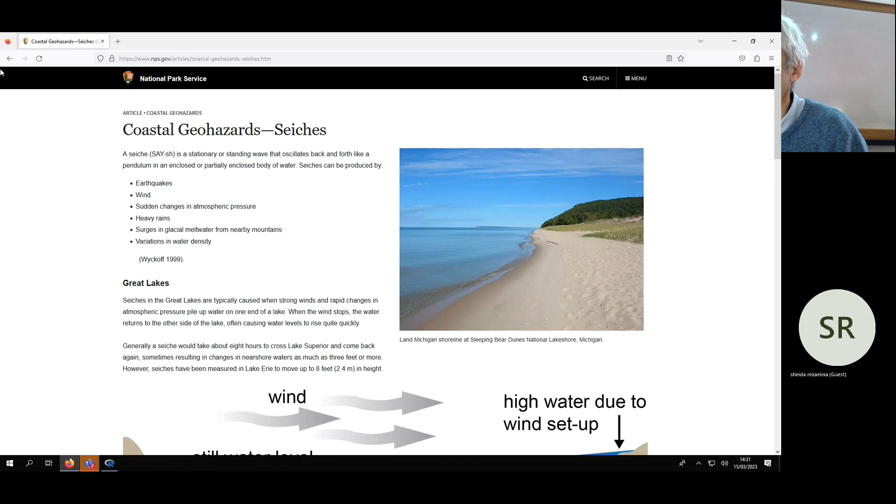Here there is another explanation about the seiches and the Great Lakes, and you can see the same mechanism here.

Keep in mind, let's go back to the previous link to make the correction. Wind usually is not periodic, but imagine a situation where wind is intermittent: when the wind stops, water comes back, and when the wind starts again, the water, after coming back, starts running again in the opposite direction. In such a situation, the displacement of water may be exacerbated, may be increased, because the system has gained additional energy.

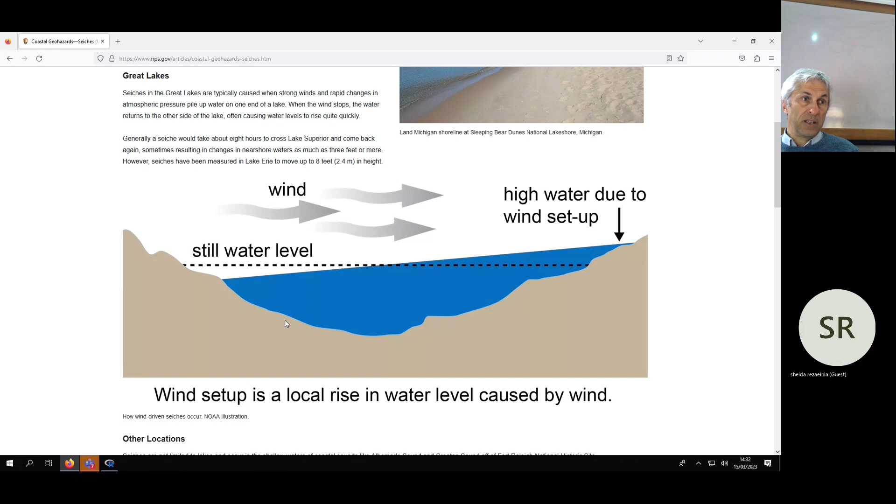Even without any additional forcing, the system will continue to oscillate for some time. When one of these oscillations occurs and wind starts again, the system gains additional energy. Therefore, the combination of the energy from the forcing and the energy accumulated by the system may indeed increase the displacement of water.

On the contrary, if the wind keeps blowing when the water comes back, then the friction of water going against the wind contributes to reducing the oscillation.

So if a forcing is periodical, there is an important feature we need to check: the frequency of the periodicity of the forcing, which we hope doesn't match the frequency of oscillation of the water body.

Usually a water body has an inherent period of oscillation, which is an inherent feature of the water body. So when I said the Great Lakes period is about 7 to 10 hours, that's an implicit admission that this frequency, or period—the same thing—is an inherent feature of the water body.

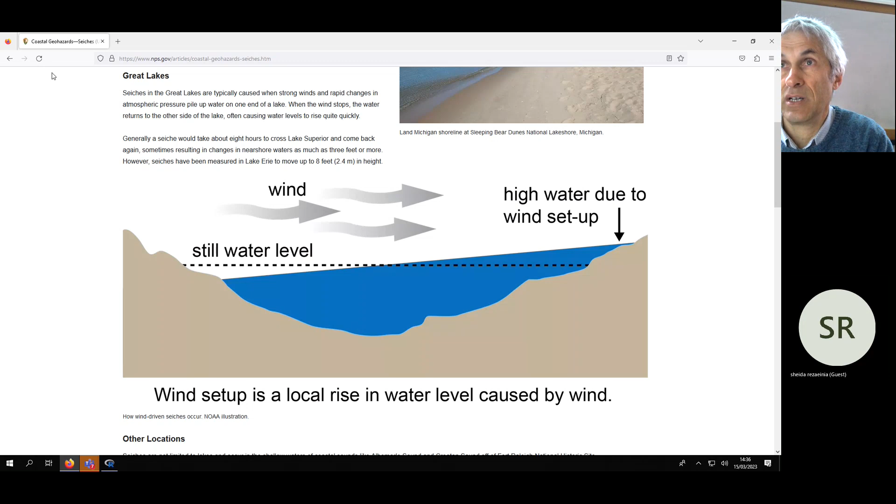Now, after giving some definitions which I think we can avoid here because they are very trivial—closed basin, open basin—you can have a look at them, and I already discussed them last time. Let's try now to better understand how we can check this matching of frequencies.

First of all, let me show you what happens when we have this matching of periodicity. This video was shown also last time. Just one second, because we need to wait for the advertisement to stop.

This was created in the lab. You see there is a wave generator, and there is a frequency of oscillation of the waves. Here they are generating the waves with a frequency that is precisely the same as the natural frequency of oscillation of the tank, of the pool. And you see there is a progressive increase of the amplitude of waves.

There is an interesting thing you can see in this video, which I discussed last time. Let's go back some seconds. Here you see the waves traveling. Then when it starts to amplify the oscillation, you have the feeling that the velocity of the wave slows down, and the waves are just going up and down, no more traveling towards the end of the pool. There is still some movement towards the end of the pool, but it is much slower.

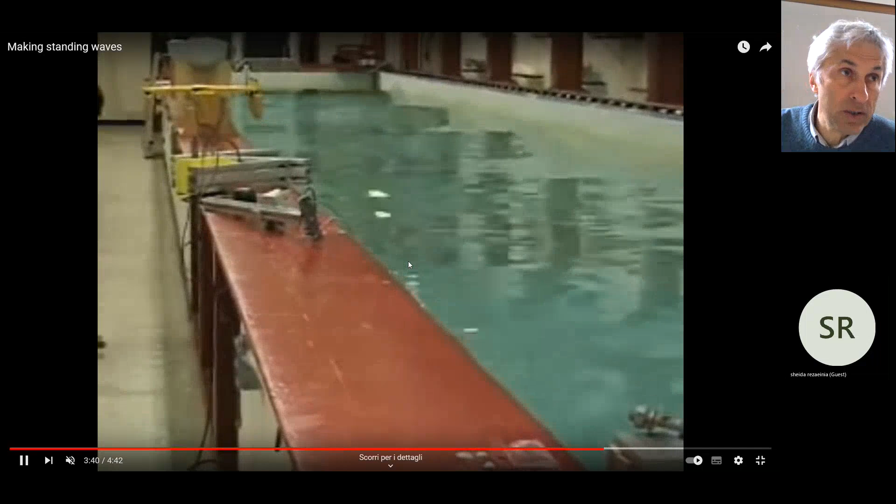So why is there this continuation? Because the wave generator generated energy and gave this energy to the water body, and the water body keeps the energy even after stopping the wave generator. This is an important concept we have to take into account if we want to understand resonance.

Okay, let's go back. So, hydrodynamics of these seiches. First of all, it is a complex problem, and we need to refer to simple conditions - for instance, a basin with rectangular shape, a harbor with rectangular shape, better if it's long, more long than large. And we need to refer to the situation with no friction if we want a simple description, and so usually this is what people do.

Still, the hydrodynamic model is not easy because you have to apply conservation equations. You have to apply conservation of mass. You have to apply also conservation of momentum in order to describe the waves. And you may have to take into account, if the basin is not very deep, some friction. So the description is quite complicated, and we are not describing it in detail here.

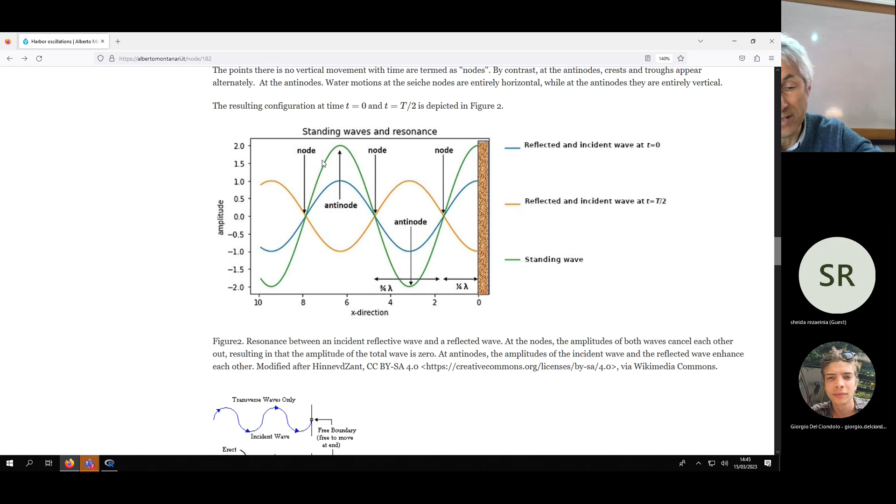These figures show that the reflected and the incident wave are displayed with the same line, and then they sum up to originate the standing wave. So whenever you have a wave entering a basin and the wave is fully reflected, what you get is a wave that looks standing, it's standing, and the amplitude is twice. Now we need to prove it. And there is one more thing I want to say.

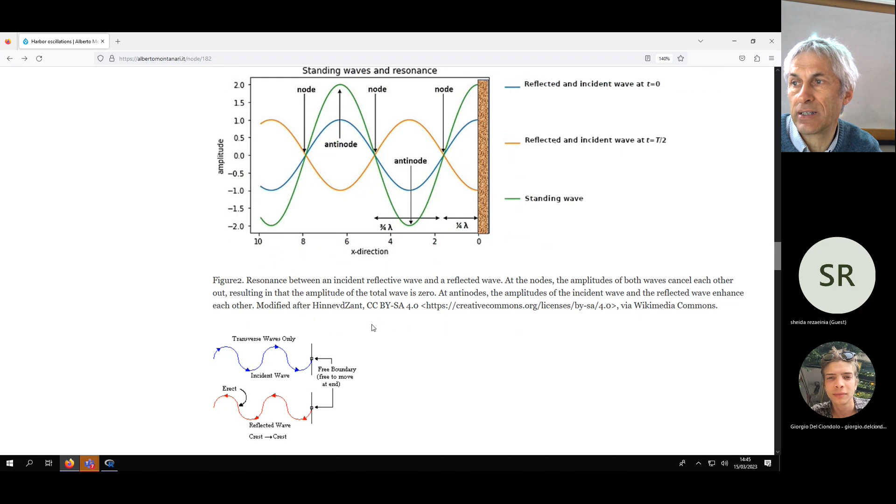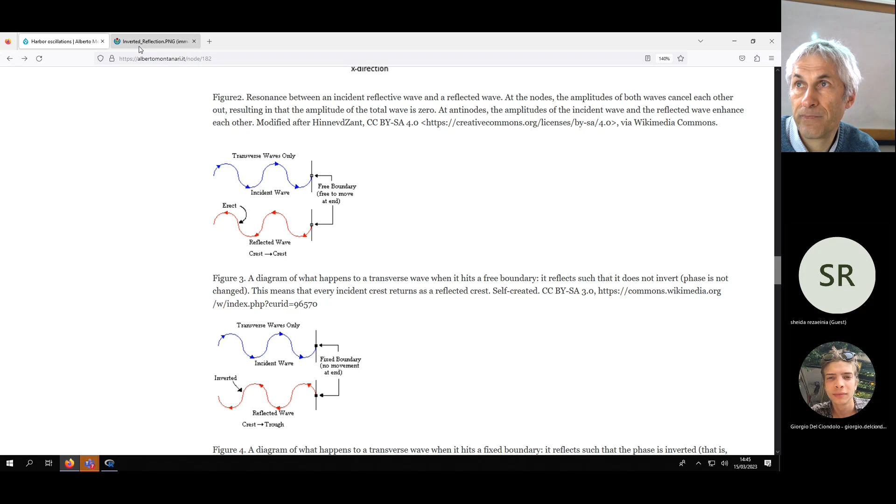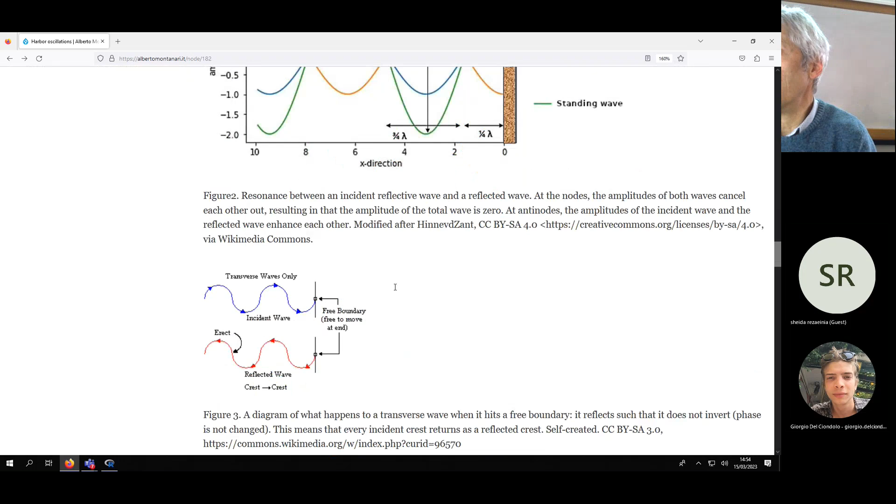It is interesting, and a bit of fun, to try to generate this figure here with software—at least an approximation. Let's see if we can succeed in doing that.

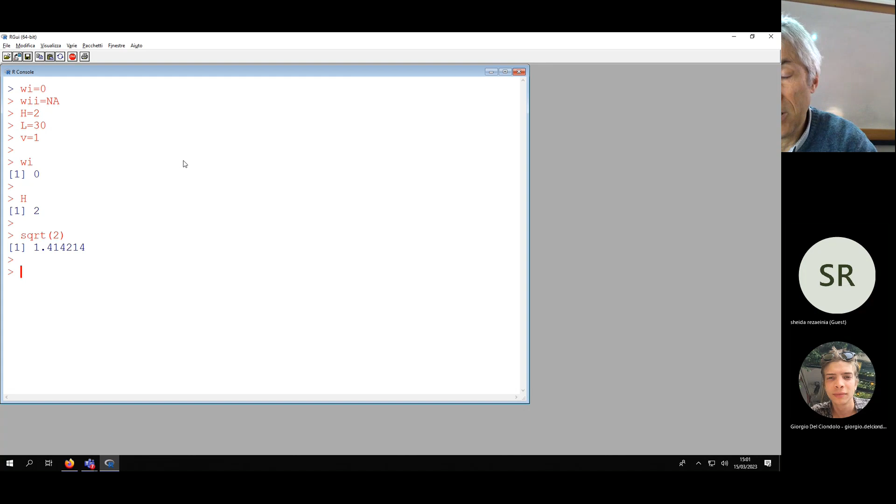And the argument is given between round parentheses. These are the very basics. I just wanted you to know there are functions already pre-prepared, so before getting into something complicated, before writing code in R, it's better to check what's already embedded into it. Support can be found on the web, or through the help function, like ?sqrt, which opens a web page with help showing a description of functions like ABS, absolute value, and sqrt.

Okay, now let's take this first part of the code. Let's copy these instructions. I don't want to really go into the details of what these instructions mean now. We will have the second part of the lecture today where we develop an exercise, which I will inspect in detail.

Let me just for now make a cut and paste. So I copied it and let me paste it. Okay, and you see here that there is a plot window on the right which appeared.

And this refers to the calm conditions. This is a cross section of our harbour. So what we see on the screen along the vertical direction is indeed the vertical direction, and on the right you see the wall of the harbour. The horizontal line is the sea level in calm conditions.

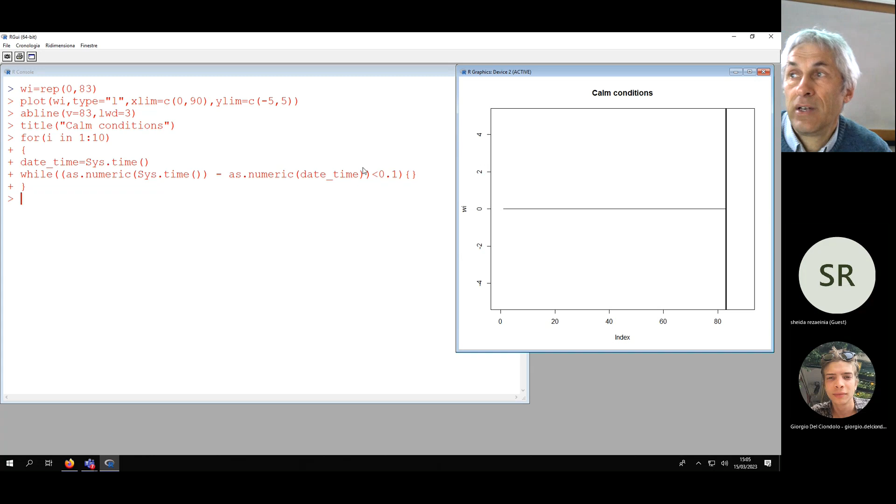Then it says, while the current time minus the time I retrieved just before is less than 0.1 seconds, I do nothing - just keep doing nothing for 1 second in this case. Of course, if I want to increase the delay, I just increase from 0.1 to 0.2. So this is drawing the line in calm conditions.

Now let's look at the next step. It is repeated 83 times. Why 83? Because I want to draw a wave traveling from left to right, from 0 to 83, since I decided to put the wall at the abscissa of 83.

Here what I'm doing is building a new vector Wi, overwriting the vector of the calm conditions, but step by step, because only the part of the vector that goes from 1 to I is overwritten, with the formula of the wave depicted here.

Just a second, I go back to the formula - this one, equation 1. And here I put some parameters: cos, you see the A, capital H divided by 2, cos 2 pi.

And then there is a sequence from 1 to I. The sequence from 1 to I is - going back to the web page - x divided by L. And then the second part is time. I relate time to x by setting the velocity of propagation of the wave divided by the period, which you can find here even without going into the details.

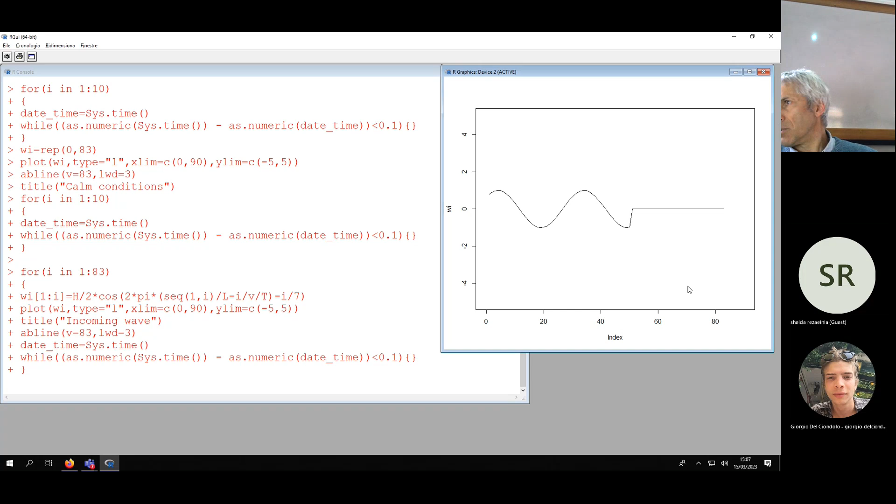So you see here - I don't understand why there is this, we will see. The wave is traveling up to there. I don't understand why it was flashing. I think the reason is just that the PC is a bit slow, because my PC was not flashing. Okay, let's make it again.

And in order to make it again, let's just try not to overlap the console. I make it again with another paste. You see there is calm condition, and then there is the propagation, it's a bit flashing - I don't understand why. Okay, this is the wave that is incoming.

And then at this point, the reflection starts. So the next part of the code is to start the reflected wave.

Let's have a look. The reflected wave is all in all similar, but I have a second wave, WII, which has a similar formulation. I just have to elaborate it a little more, because it is easier to write a wave that goes from 1 to 83 rather than drawing a wave that comes back from 83 to 1. It's a bit more complicated in terms of coding, but it is really all in all the same thing.

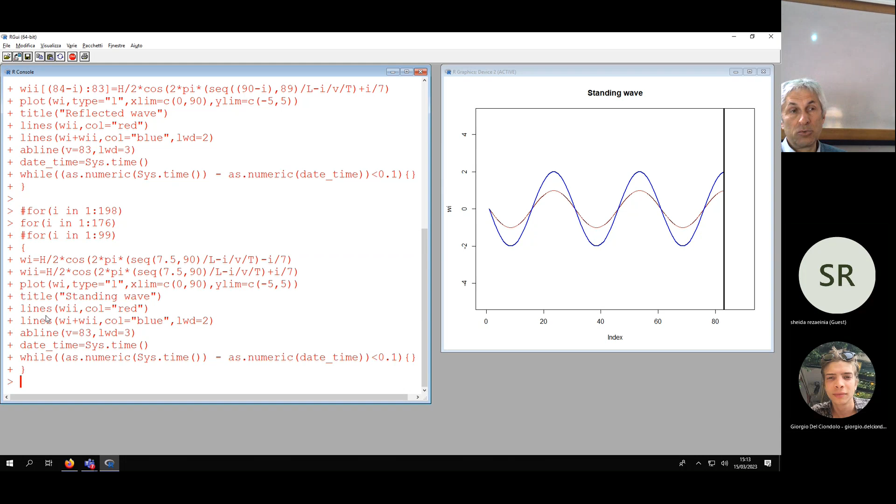Okay, now here we don't see amplification. It is just a summation of two waves which lasts forever, doesn't amplify. We get a standing wave with twice the amplitude, but we don't get amplification. So why don't we get amplification here? Because here we are just superimposing, we are not describing energy. We are just superimposing an incident wave and a reflected wave. We are not describing the energy of the system.

Actually, what happens to the energy of the system in such a situation? You see that the incoming wave and the reflected wave give a push, look at the screen, to the trough of the first trough of the standing wave. And if you look at the first crest of the standing wave, again the two waves, the incoming one and the reflected one, give a push to the crest of the standing wave.

This means that if I describe the energy of the system, I would have the harbor that is getting energy, because as I can see here, there is a mass displacement given by the fact that the two waves, the incoming one and the reflected one, superimpose each other. But the incoming wave is continuing to bring energy into the harbor. It's continuing, and I'm not describing this here because, as I said, here I'm just putting the two waves one over the other, but I'm not describing the energy of the system. If I had to describe the energy of the system, I should take into account that the incoming wave is bringing energy, and this energy may conflict with the energy accumulated by the bay.

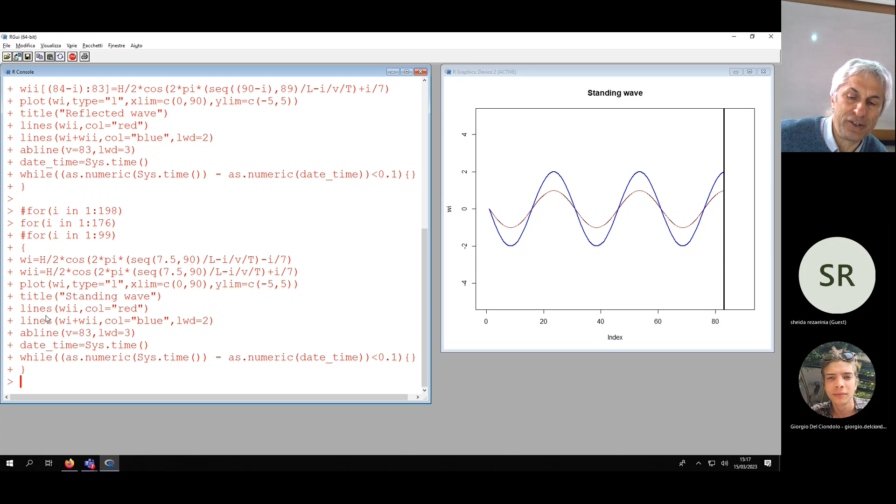So you understand, you understand why people are paying attention to it. Unfortunately, I don't have a video of a flood into a harbor originated by a standing wave, but there are several other videos showing the effect of resonance on structures. I want to show you one which is very famous, also on Wikipedia, the collapse of a bridge in 1940. I think it was in the United States.

This is the fundamental job of an engineer: to compare loading conditions to strengths. If the loads exceed the strengths, you know you've got a problem.

This is a bit too long.

I will move forward. Floods, snow, rain, ice, earthquake.

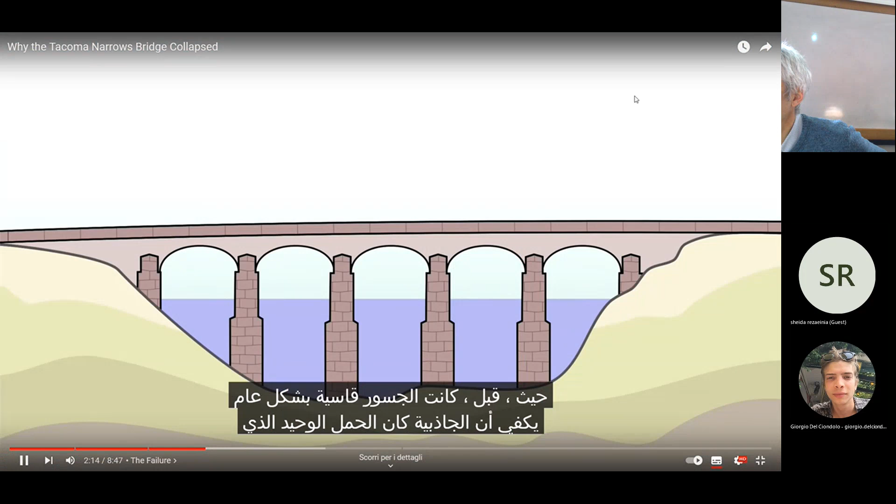This advantage of being able to span long distances while minimizing material gives suspension bridges this appearance. But that same minimizing of material reduces the rigidity and stiffness of the structure. Where before bridges were generally stiff enough that gravity was the only load that needed to be considered, now a new force started to impact their designs: the wind.

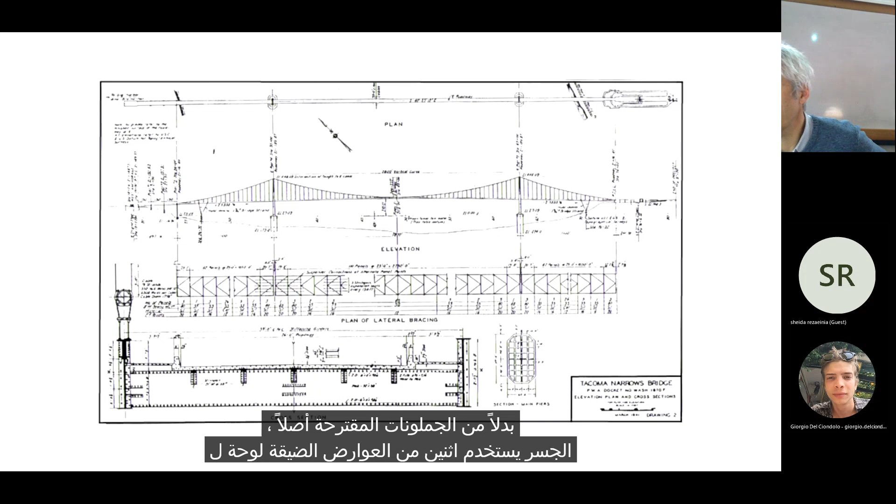In July 1940, the Tacoma Narrows Bridge opened to traffic between Tacoma, Washington, and the Kitsap Peninsula. At the time, it was the 3rd longest suspension bridge in the world. Financing construction of the bridge was a major obstacle, which led the state to pursue an innovative design. Rather than the originally proposed trusses, the bridge used 2 narrow plate girders to stiffen the deck, giving the bridge its iconic steel ribbon appearance across the Puget Sound.

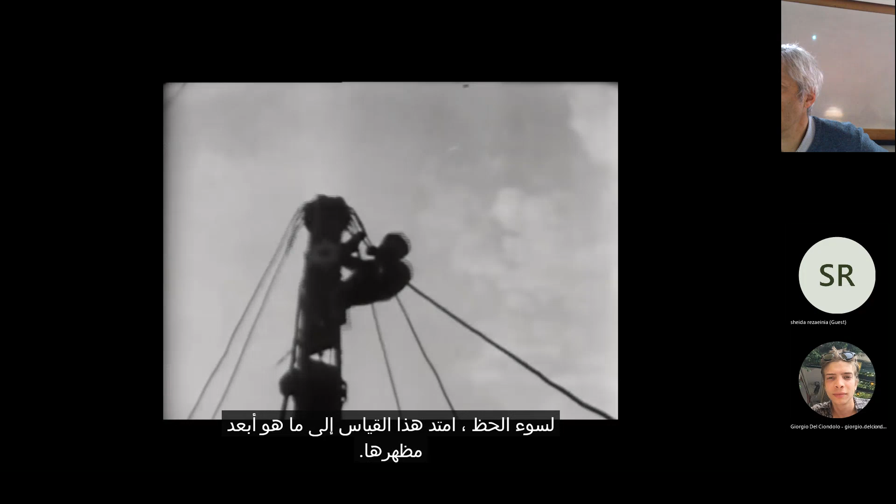Unfortunately, that analogy extended beyond its appearance. Even during construction, it was apparent that the bridge was too flexible, even under moderate winds. Construction workers gave it the nickname Galloping Girder. Only 4 months after it opened, the bridge collapsed in dramatic fashion. In fact, this failure was so dramatic, there's a good chance you've seen this video before.

It was just people walking on it. And let me just check.

With resonance, small periodic driving forces, like pushing someone in a swing, can add up to large oscillations over time.

Just 1 second, I want to see, because it was very short. Very short, so let's see. This is 4 minutes.

As you can see, this bridge was exceptionally long and narrow, over half a mile long, only 39 feet wide. It lasted just 4 months.

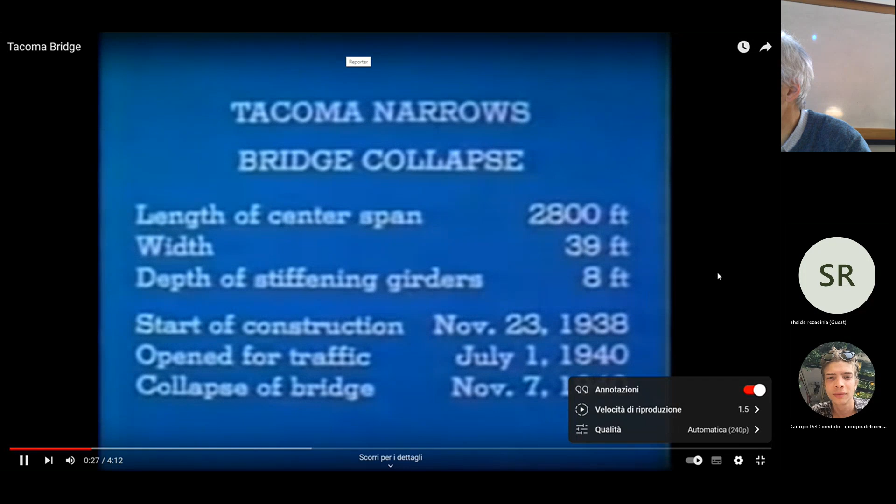During construction, we see the steel girders, 8 feet tall, which were supposed to stiffen the bridge against bending. However, some up and down vibration was observed during the entire useful life of the bridge.

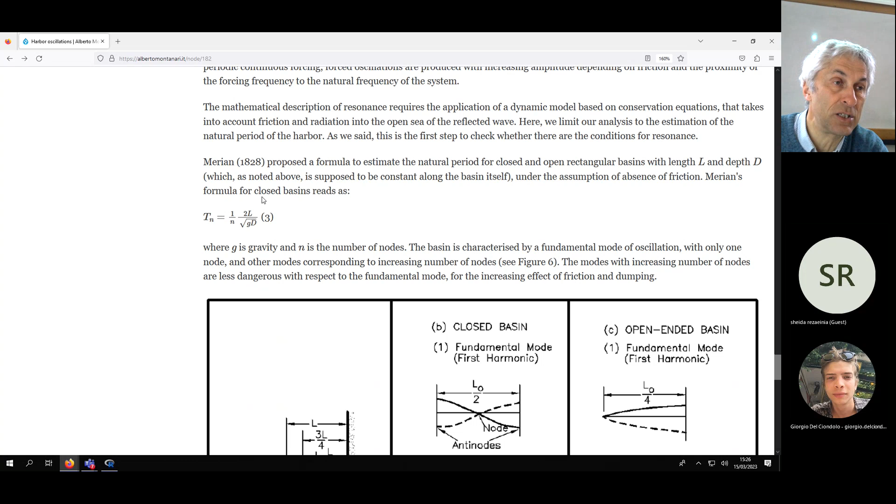But this is for closed basins. For open basins, it's this formula, for the fundamental mode. Given that you have a free end, an antinode at one end and a node at the other, you have to take 4L instead of 2L for the length of the bay, because you have to double the length of the harbor. Why? Because you have one free end, so the fundamental frequency corresponds to twice the length, and then you multiply by 2 again because you have the path to come back, the time taken to come back.

So this is the Merian formula, which is like a preliminary computation. It is valid for rectangular basins. There are all the assumptions listed on the web page, and please make an effort to remember how it works, because this may be a question at the exam.

I wanted to dedicate some more time to this, because I think it's interesting and it's also a topic that's not easy to understand. You are students with a good knowledge of wave mechanics, so it's relatively easier for you, but it's not easy to understand reflection or how resonance works. If you look at the references, the math is very complicated, because they attempt to describe the hydrodynamics mathematically. What I did here is something more conceptual. I didn't go into the details, I just tried to explain to you how it works.

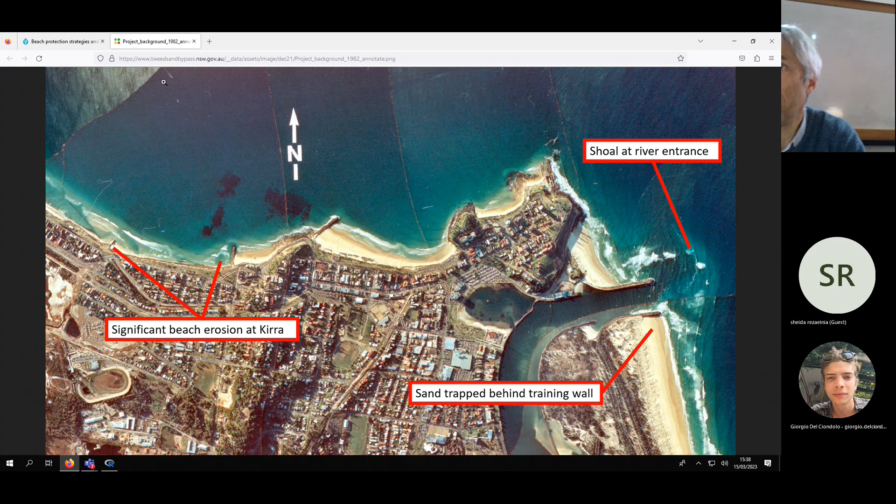But they are monitoring carefully. Okay, so this is why we focus also on beach protection, because it is frequently needed in the vicinity of harbors. Now, first of all, keep in mind that beaches are a very active, dynamic environment.

They are the subject of ongoing research because it's not easy to describe their morphodynamics, or erosion and accretion, which may alternate. Typically during winter there is prevalent erosion, and during summer prevalent accretion. So it's really a very dynamical system, studied by the discipline of beach hydrodynamics and morphodynamics.

As I said, I'm focusing on it in the lectures of coastal engineering, so we will not go into details here. But I am interested in trying to classify the interventions because these very often require some engineering design. I don't have a PowerPoint, so I'm increasing the font and using the screen just as guidance for me. There are several categories of interventions that we can use to remember the possible solutions.

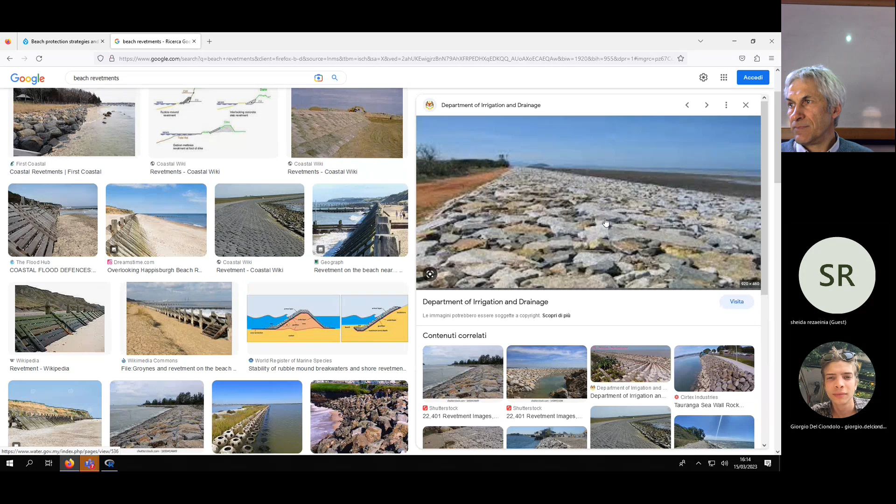Cobbles usually are called by their name, so we say beach protection with cobbles. But for instance here, this is also a revetment, and you see that, okay, these are not really cobbles, but if you see here, this is also...

Here you see a series of revetments. You see here, these are cobbles, basically.

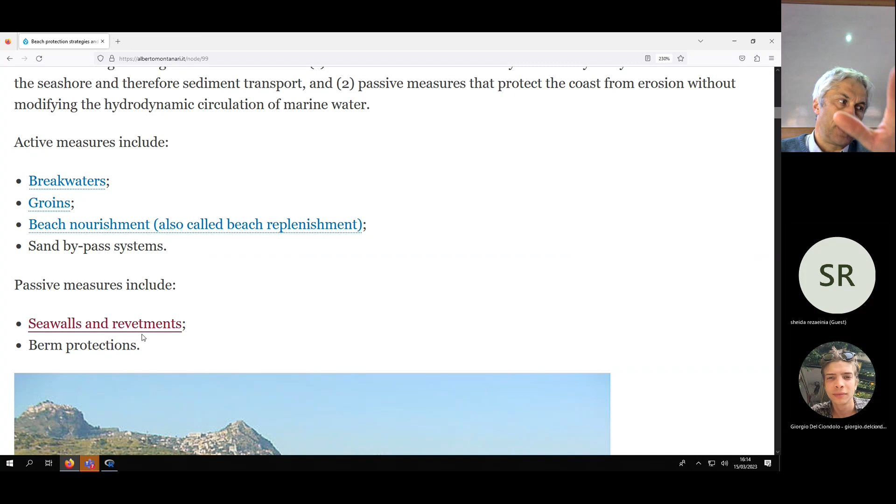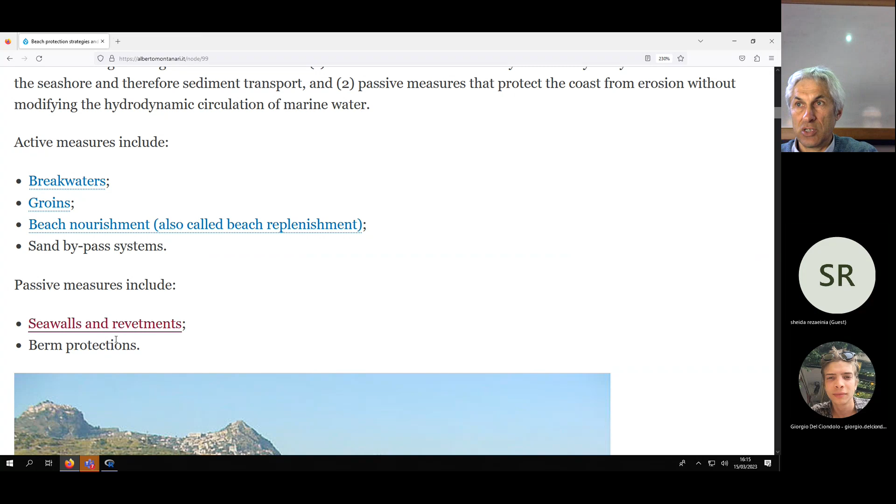And then we have also berm protections. You know that the berm is the part of the beach located at the end of the wave run-up, at the end of the swash zone, at the last end of the average wave. So the wave climbs up along the beach in the across-shore direction to a certain extent. At the limit of the wave run-up across the beach, there is a deposition of sediments. This deposition originates the berm, which we talked about in coastal engineering, and the berm is a kind of natural protection.

This is something usual: the berm is located at the end of the summer waves, not at the end of the storm waves. At the end of the storm waves, you have another step, which is the dune. The dune is higher than the berm, much higher. The dune may be 6 to 7 meters high, while the berm is about half a meter. Between the berm and the dune, you may have a small channel, which is called the runnel.

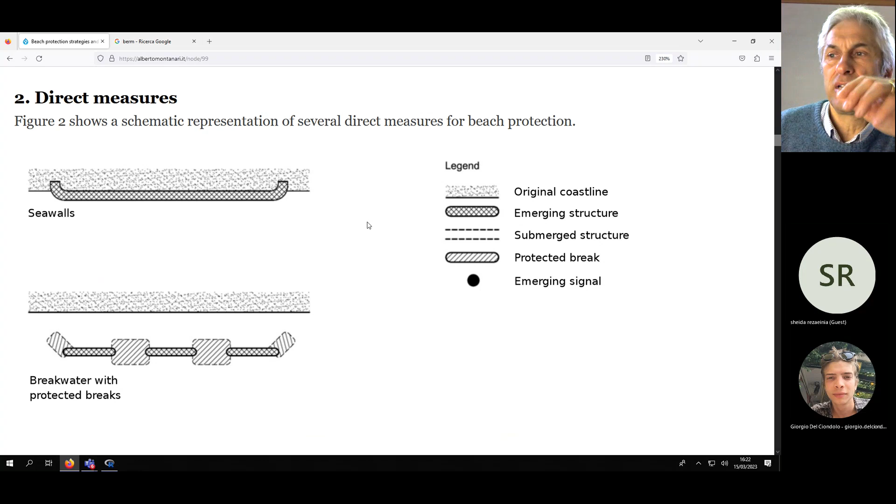With the black circle, we identify emerging signals. For the seawalls, there is not much to say - they are typically emerging structures. In the second figure, you see a breakwater with protected breaks. The breakwater in this case is emerging, and these are the structures contoured by the black thick line.

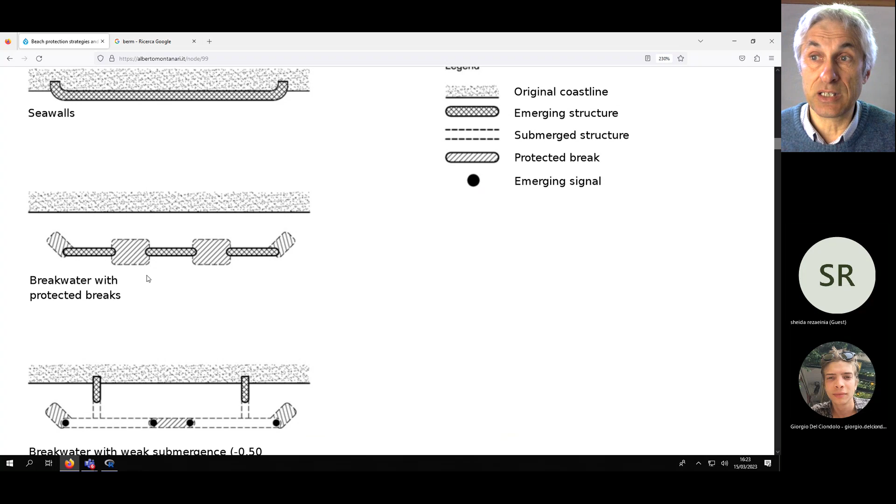Then you see we have submerged protections, which may be realized by building a submerged breakwater, for instance by putting boulders on the bottom of the sea. These are submerged protections to protect the breaks, because if you don't protect them and you have a concentration of erosion there, it may cause a failure of the breakwater structure.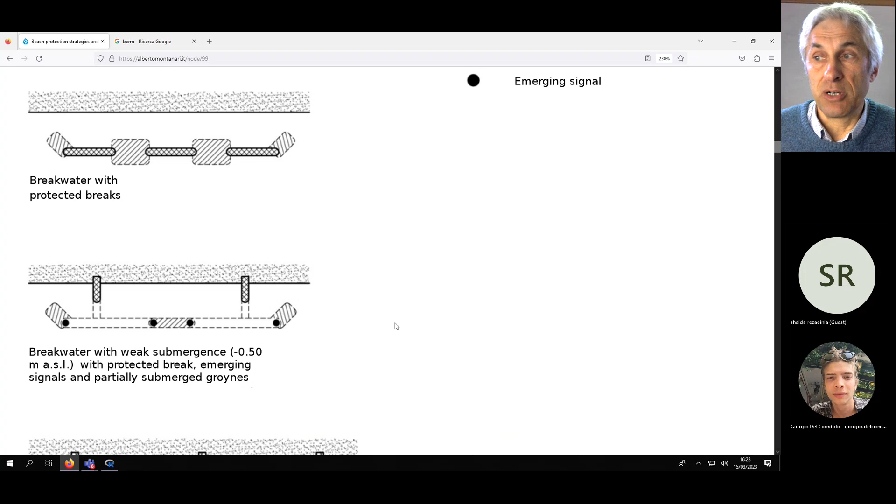Breakwaters can be submerged. Usually when we submerge them - this is the third figure - we may mark them with signals for the boats. Here we also have partially submerged protected breaks and partially submerged groins.

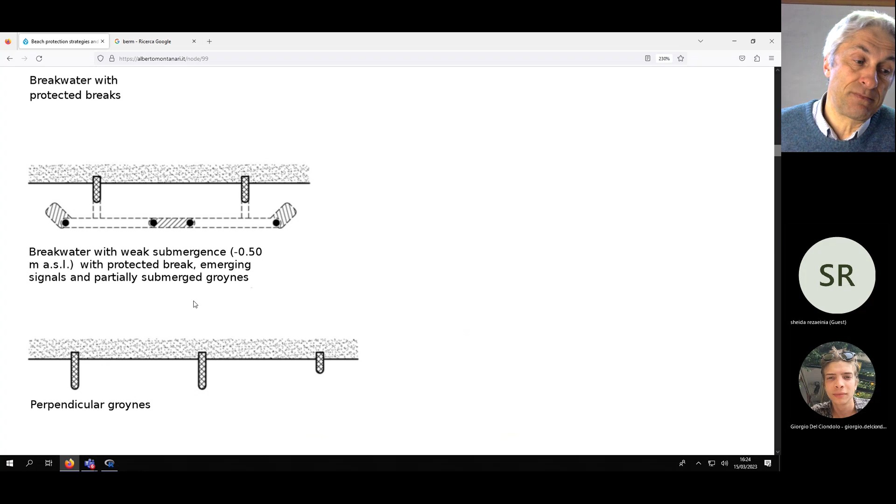So the breakwaters can be coupled with groins. In particular, groins may be efficiently coupled with breakwaters when the breakwaters are submerged, because otherwise, if you contour a beach with a breakwater and two groins, it's like closing it off. So in terms of hydrodynamics for preserving water quality, and in terms of visual appearance, it's not very advisable. Sometimes you can find them coupled, but we could consider submerged structures. The groins usually are not submerged, even if in principle it's possible to submerge them, at least in part.

The groins can be distinguished into two types: T-groins and straight groins. The T-groins are more effective in trapping the long-shore sediment transport, because you have the formation of a pocket in correspondence of the T, the head of the groin.

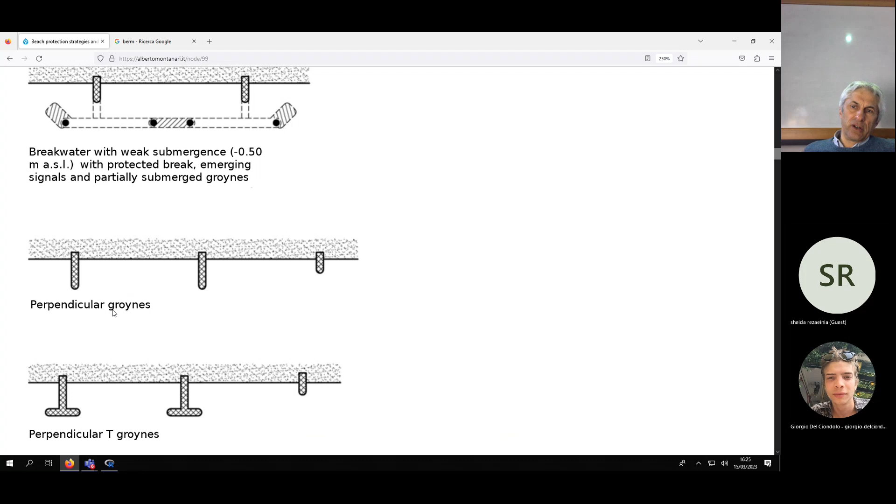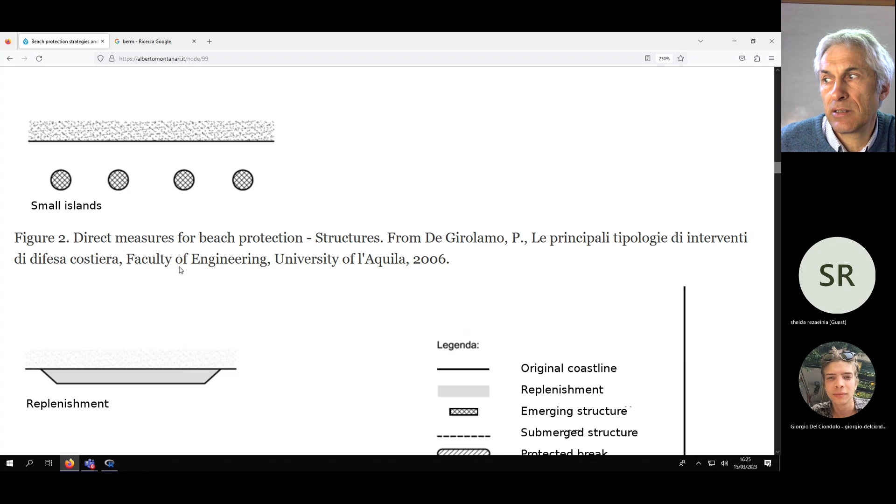We can use small islands, and we can use replenishments, as we said. Replenishment is an interesting option. I will talk about it at the end of the discussion of these sketches. So now, replenishment may be coupled with groins and breakwaters, so we may have an integration of measures.

Usually, this is advisable because if you just replenish a beach, you have to expect subsequent erosion. And the subsequent erosion may be quite fast because if you feed the process of erosion with sand, the process accelerates. I mean, to bring sand in a place which is susceptible to erosion means accelerating the process.

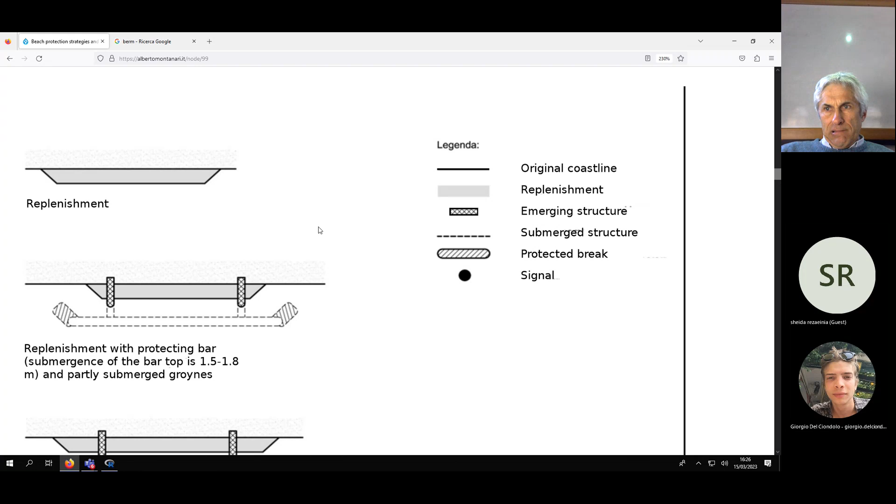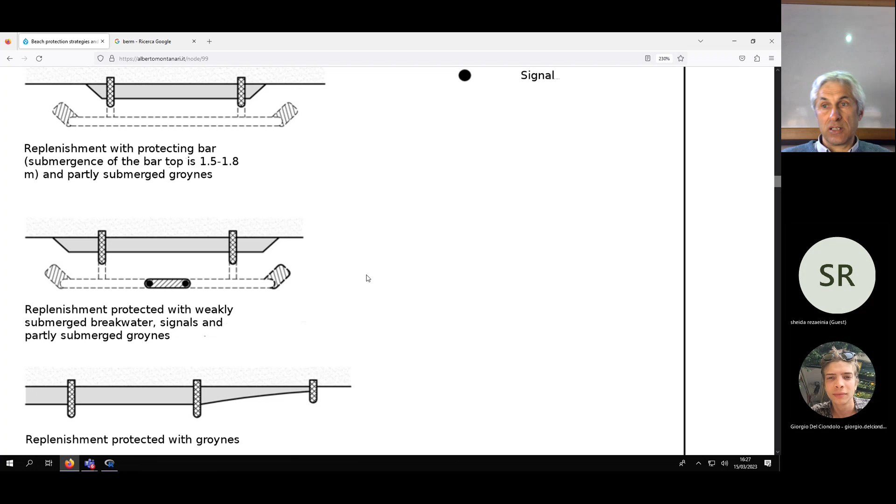So maybe we can compensate with groins or breakwaters, depending on the dominant direction of the sediment transport. We can also combine the groins with a submerged breakwater. A submerged breakwater is similar to a bar, or with an emerging breakwater with signals. And here we have a replenishment with groins and T-groins.

Okay, now let's talk about beach replenishment, because it is an interesting option. But on the one hand, as I just said, we may need to couple the replenishment with some structural intervention. And second, there is an important choice to be made about the size of the sand.

And then if you get sand close by, it may be different because the size of the sand is dictated by very local conditions. So it is determined by the inflow of sand from rivers. And it is also determined by the hydrodynamics of the beach. So it is a very local feature. And therefore, it is not easy to find sand that looks precisely like the original one and is physically identical.

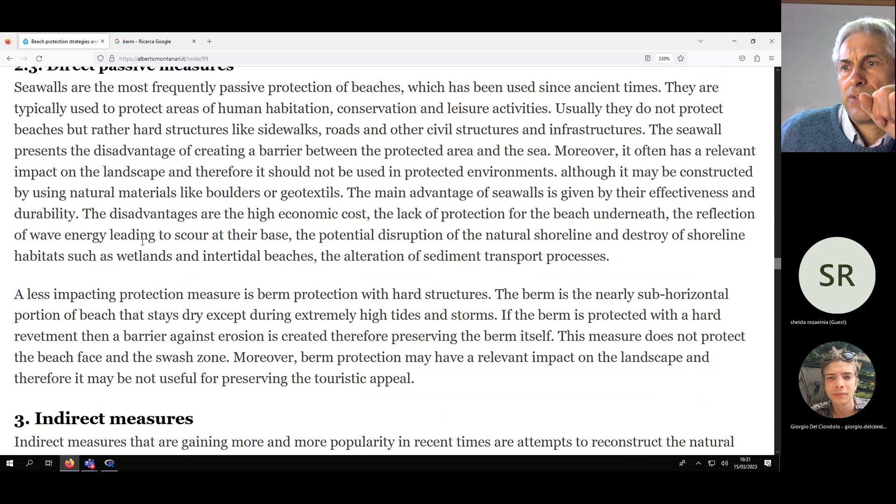Okay, I think I would prefer that I stop now with this lecture, and I take it back next Wednesday. We are close to the conclusion, but still there is something more. There are some more figures and pictures that I wanted to show you.

So I prefer now that we concentrate on the exercise because we have less than 1 hour and the exercise is interesting, I think, at least in my intention.

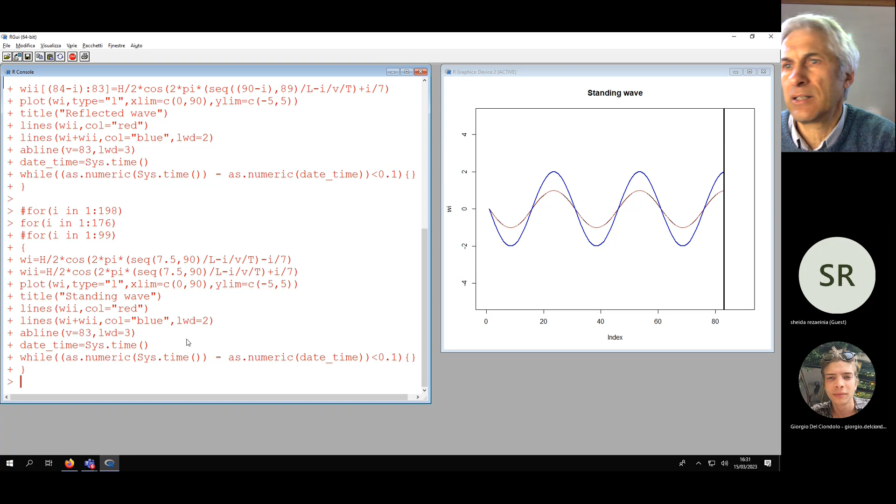Okay, so I still have my R window open. Let me clear the screen and let me go to... Sorry, how do you clear the environment in R? Okay, there is first a possibility. I show you, because we created some, we defined some variables vectors, and you can see what you created.

They clear the screen, you mean? No, clear the variables. Okay, perfect. Here are the variables that we defined. Now, to clear them, what you can do is first go out from R with this function, and then it asks you, do you want to save? If you say no, it's cleared up. Okay, this is a possibility.

Now, I don't know if there is a function to remove everything, because you can remove variables with the rm function, I think, but you need to specify the name of the variable. Okay, D50M. Let me just see rm, because I think we can use remove to remove everything. Let's see. Remove the objects to be removed. Let's see.

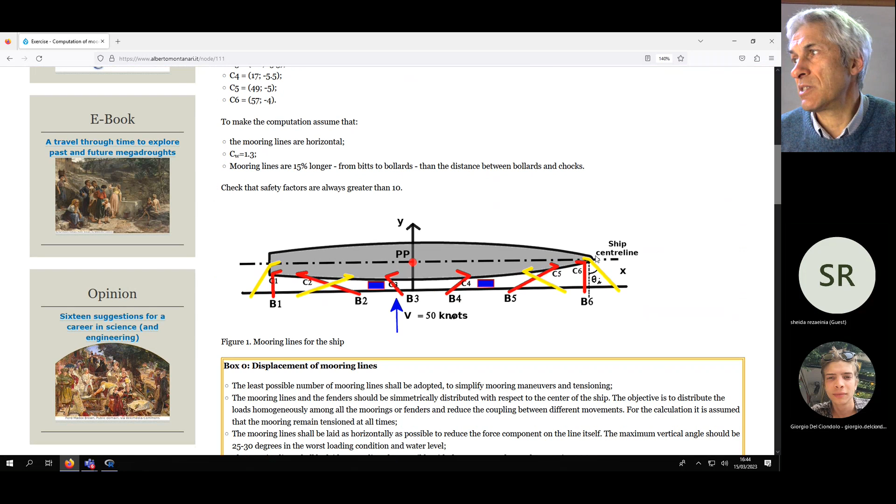Okay, so we have some forcing, let's read it. So there is the displacement, the tonnage of the boat - I don't think it is used here. Waterline length of 117 meters, remember how we define the waterline length. A draft of 5 meters, a beam of 12 meters, pivot point located at 55 meters from stern, which means this is stern, and side projected wind area of 950 square meters.

Okay, and we have 6 mooring lines, red lines. The yellow lines are additional ones shown for the sake of illustrating further possible lines. The ship is subjected to an extreme wind velocity of 50 knots, about 90 kilometers per hour - quite huge - with wind direction perpendicular to the ship's center line. So the wind direction is along the y-axis, just to simplify it, okay?

The ship is moored with mooring lines composed by 3 ropes. So each mooring line is composed by 3 ropes, which are intertwined each other - I don't know how to say in English, but they are composed in that way. Cross-sectional area of each rope is 30 square centimeters, and the elastic modulus of each rope is 125 kilonewton per square centimeter, and the breaking tension is 25 kilonewton per square centimeter.

It is important, the elastic modulus, because the mooring lines are not rigid lines. We want elastic lines indeed. They don't have a huge elasticity, but we want some elasticity for obvious reasons, because of a greater resilience. But the fact that they are elastic lines means the computation is not so easy, because you have an elastic body to deal with.

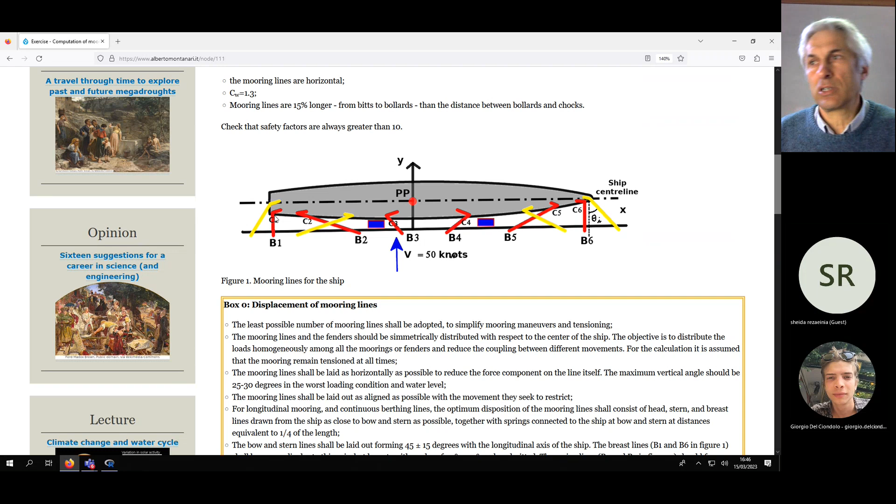Now we have to compute first the wind force and the yaw moment, and the mooring forces and safety factors. Okay, now we have the coordinates of B and C. What are B and C? Let's look here. B is the coordinate of the bollards, and C is the coordinate of the chocks. The chocks are, I think you know what they are, but let me just show you - I have a picture here of a chock.

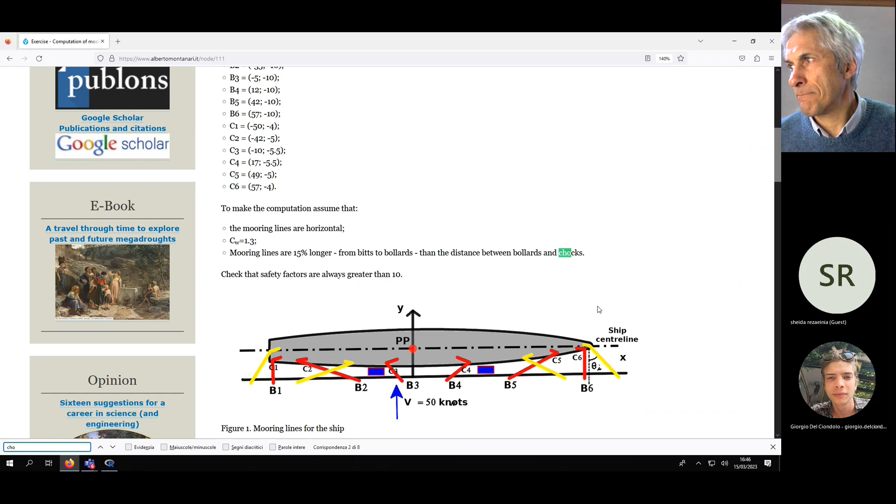One second, I'm quite sure. See here to see a picture of a chock.

Now, to make the computation, we assume that the mooring lines are horizontal. Usually they are inclined, but let's assume they are horizontal, it's not a huge complication if they are inclined. And CW is the wind coefficient, let's assume it's 1.3. Mooring lines are 15% longer from bit to bollards than the distance between bollard and chocks. This means I have the coordinates of bollard and chocks, and in order to identify the full length of the spring line, I have to increase the distance between bollard and chocks by 15%. We want the safety factors to be greater than 10.

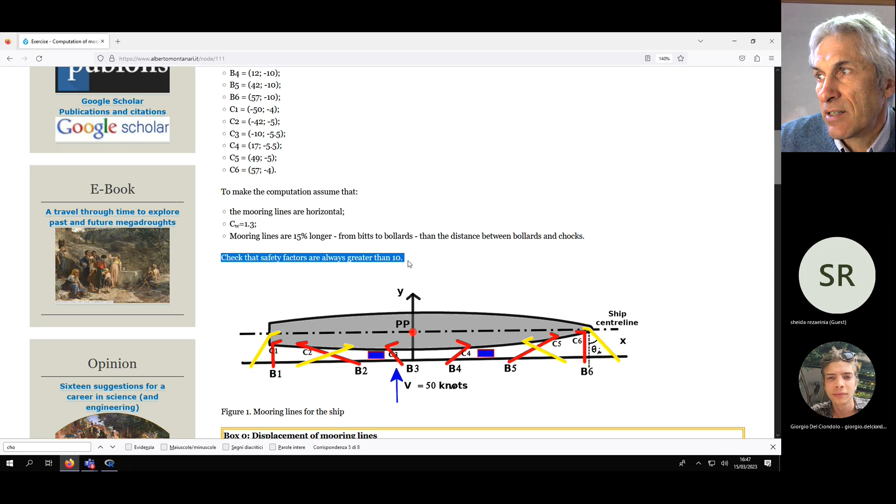Good. Now, first of all, mooring lines. Let's read these indications, which are interesting I think, because this is an exercise, but there is a lot of information included here. So the least possible number of mooring lines shall be adopted to simplify mooring maneuvers and tensioning. The lower the number of mooring lines, the better.

The mooring lines and fenders should be symmetrically distributed with respect to the center of the ship. The objective is to distribute the loads homogeneously among all the mooring lines and fenders and reduce the coupling between different movements.

The mooring lines shall be displaced as horizontally as possible, to reduce, of course, the amplification of force if much inclined, because what matters is the horizontal component in this case. And therefore, if you have a vertical mooring line, it doesn't offer any resistance to the horizontal components, as we know. What is the max inclination? As you see here, 25-30 degrees.

Keep in mind that the inclination of the mooring lines depends on the load of the ship and also on the water level of the sea, which may be changing in some conditions quite significantly.

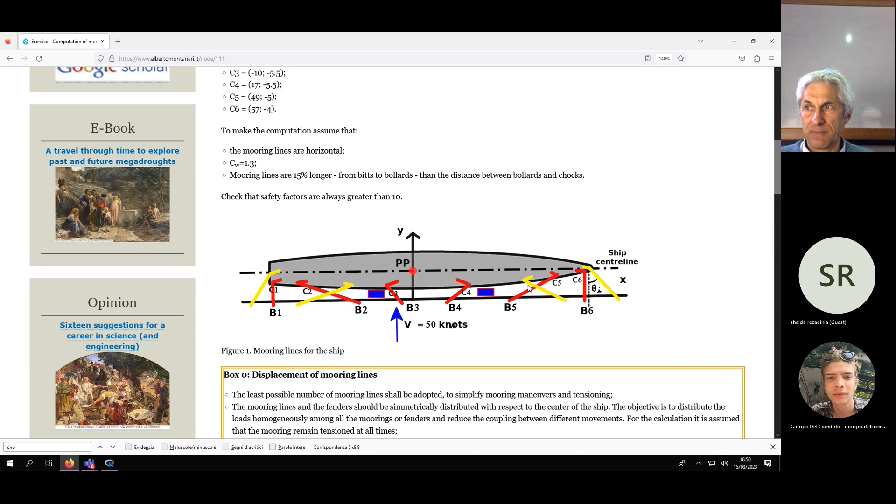Let's see here, and this is the stern mooring line. This is the bow mooring line, and these are spring mooring lines. Let me see if I use the bow and stern lines.

Okay, breast lines, B1 and B6, sorry, these are breast lines, I forgot to say this. And at stern and breast. Springs connected to the ship at bow and stern at distances of 1/4, these are the springs at distance of 1/4.

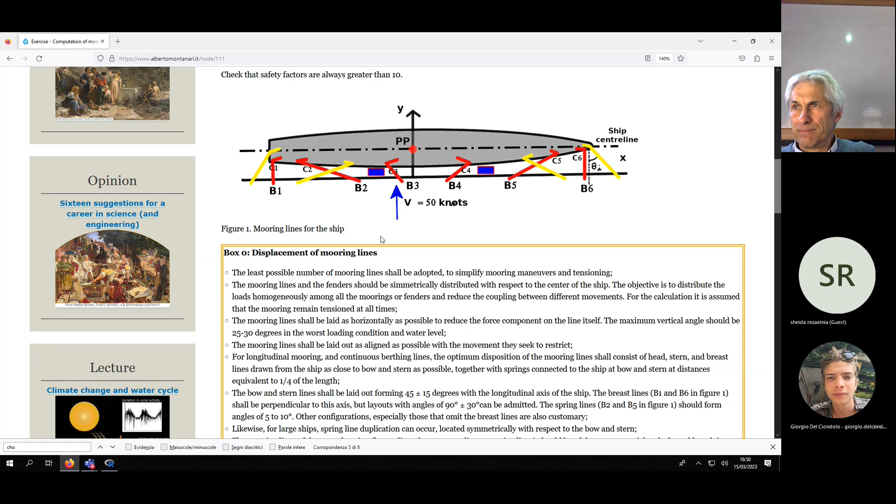I think I had a box which I presented to you in one of the previous lectures on the naming of the mooring lines, just to refresh your memory. I think it was in the lecture dedicated to port planning and environmental impact.

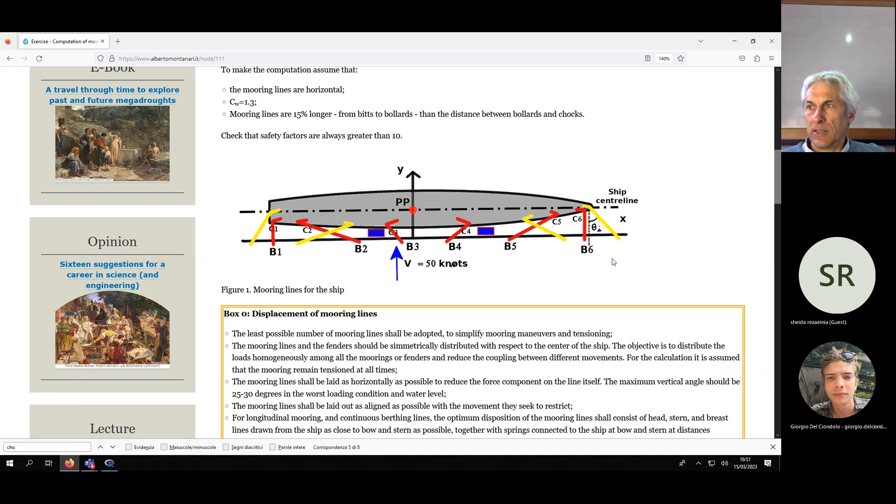The bow and stern lines should be laid out forming 45 degrees. So if you look here, about 45 degrees here and here. And the breast lines, B1 and B6, shall be perpendicular to the longitudinal axis of the ship.

And for large ships, spring-line duplication can occur, located symmetrically. And this is the application, you see, these are spring lines which are duplicated.

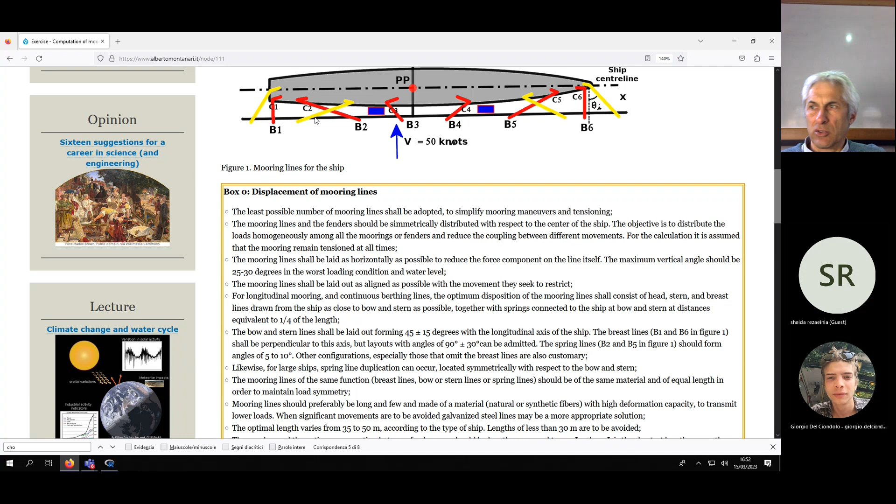And then the mooring line of the same function, breast line, bow, or stern lines, or spring lines, should be of the same material and of equal length in order to maintain symmetry of the load. Same material means same elasticity, equal length means same elongation after forcing.

Mooring lines should preferably be long and few and made of a material with high deformation capacity, as we said just a few minutes ago, to transmit lower loads. When significant movements are to be avoided, galvanized steel lines may be a more appropriate solution, galvanized to avoid corrosion.

The optimal length varies from 35 to 50 meters, according to the type of ship. Lengths of less than 30 meters should be avoided because they have reduced elasticity. And the optimum separation between fender axes should be less than or equal to 0.15 L.

Where L is the shortest length among the design ship for continuous berth fronts. These solutions, these indications, you don't have to remember them by memory for the exam. Just maybe the terminology of the spring lines, bow, stern, spring, breast, etc.

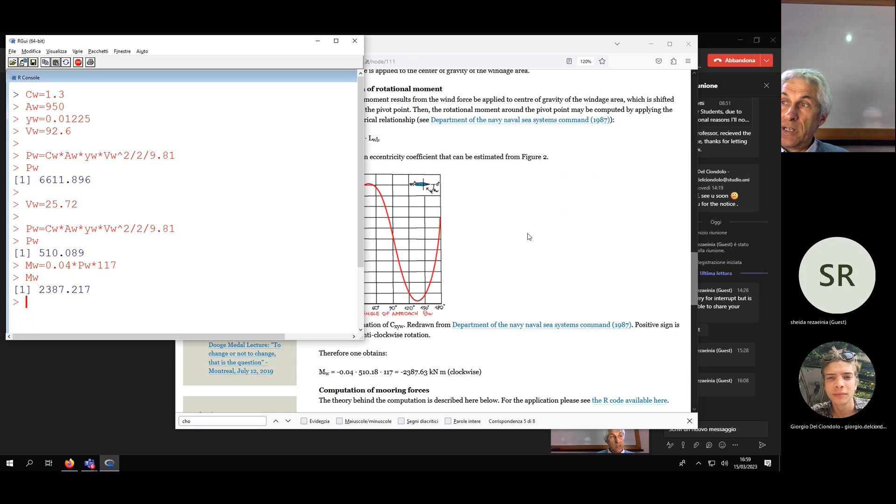So this is anti-clockwise, I would say, because it's clockwise if I put the minus. And in any case, let's see the figure here.

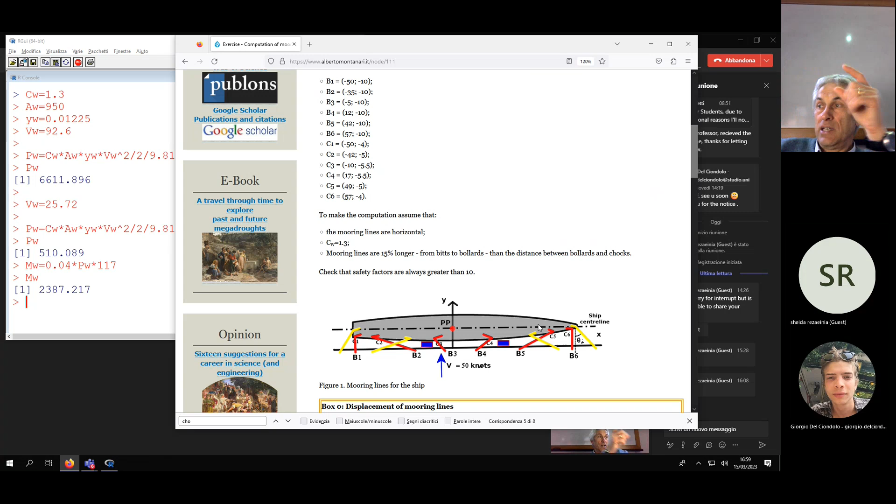So I think the ship should rotate anti-clockwise because the center of gravity of the windage area is shifted on the right with respect to the pivot point. I say it's shifted on the right because I remember that the pivot point is displaced at 55 meters from stern, which means that given the ship is 117 meters long, if I measure 55 from the stern, I get more or less here.

So the wind is blowing along this direction, so the rotation is anti-clockwise. So this is consistent with the fact that here I got a negative, clockwise. And it's always important that you get a perception of your problem, of what happens, an intuition of what will happen. This is extremely important.

Okay, now there is the computation of the mooring forces. I want to explain to you the procedure, and then we go to the computation. Now the procedure is a bit complicated, and it's a procedure that decomposes a driving force, a drift force, and a rotational moment into forces acting along the mooring lines.

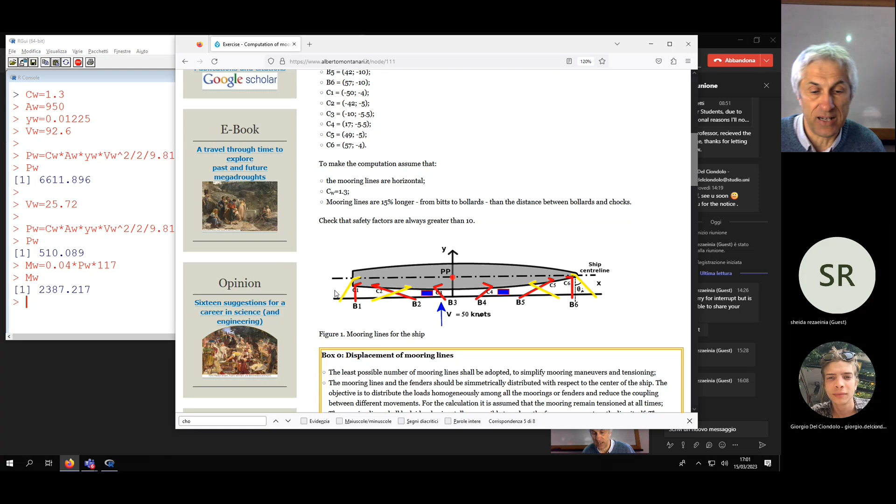So the wind force and the rotational moment are applied to a rigid body. And the rigid body is connected to the berth through elastic mooring lines with their direction. We made several simplifying assumptions, horizontal mooring lines, etc., and the mooring lines with the same section. But still, this is a structural mechanics problem, which you may have learned how to deal with, because structural mechanics is the composition of forcings. So it is something that in principle we know how to manage.

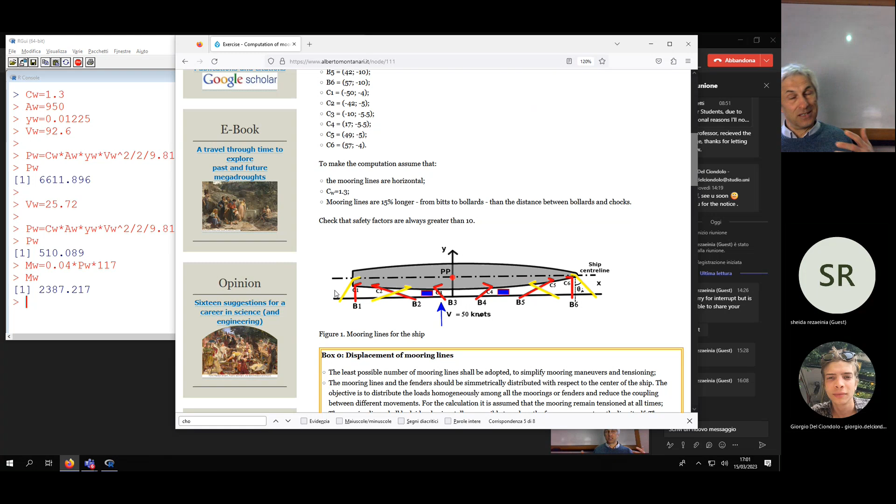But the fact that the constraints are elastic mooring lines makes the problem an elastic problem, so it is really not the simplest computation we can make. I give to you here the reference of the procedure. So here we refer to the computation method proposed by the Department of the Navy Naval Sea Systems Command. And let's see, there is a PDF which you can look at. It's not easy to read these references.

Because they make heavy use of math, the computation that I'm proposing to you has its details reported here. I simplified the solution presented by this PDF.

For the calculation, let's first recap the assumptions. The elastic modulus of the mooring line does not vary with mooring forces, it's a constant. The mooring line arrangement is symmetrical with respect to the y-axis, and if you look at the sketch here, the red lines show this symmetry.

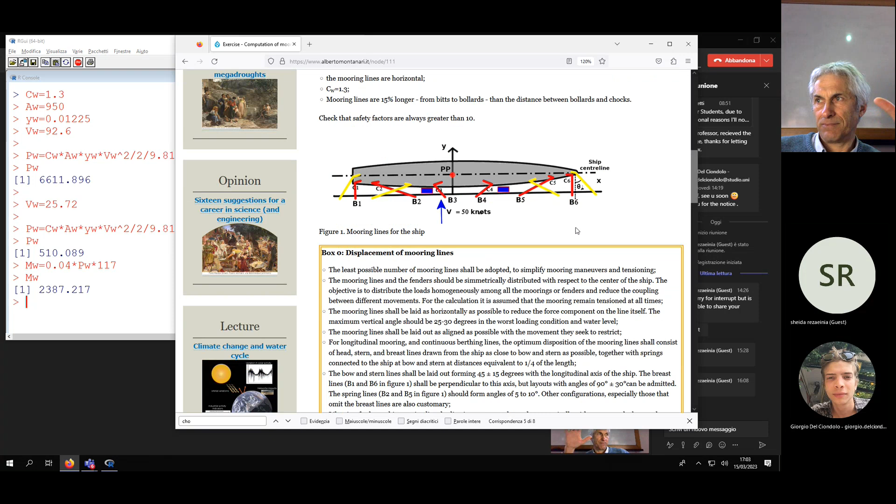The yaw moment Mw and lateral force Pw are applied to the ship's pivot point because we computed the wind forcing. If we want to compute the mooring forces, we have to apply this resulting wind force to the pivot point of the ship, and then we have to add the rotational moment.

The mooring lines are assumed to run horizontally. But in the reference I'm providing to you, there are instructions to relax this assumption.

Let's now look at the step-by-step procedure. Until about two-thirds of it, it's very straightforward. The final computation, which is the actual decomposition of the wind force and the yaw moment along the mooring lines, we won't get into details—it's a pure procedure of structural mechanics. Maybe you already have some knowledge of it; otherwise my suggestion is to take it for granted and just trust that it's a procedure of structural mechanics.

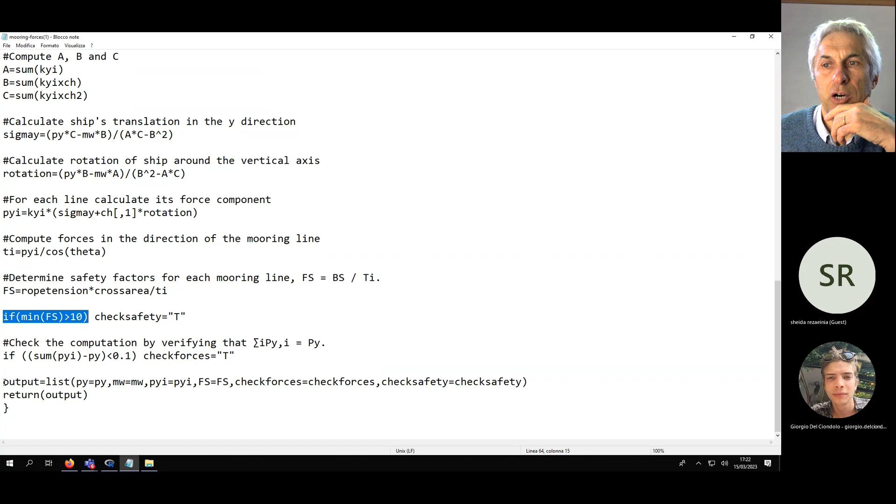So if min fs is greater than 10, check safety is okay. And now there is the output. This is the last thing that I think it is useful that I tell you. The output is a list, which means that it's a cluster of results where each result is named. Into a list you have names.

In fact, you may remember that here, when I type A, which is the result of the computation, I have a list of several results. And the dollar sign identifies the name of each result, which I defined here. Py is equal to py. Py is the result of the computation of the vector that computes the forcing along the spring lines in the y direction. And then I have the remaining ones.

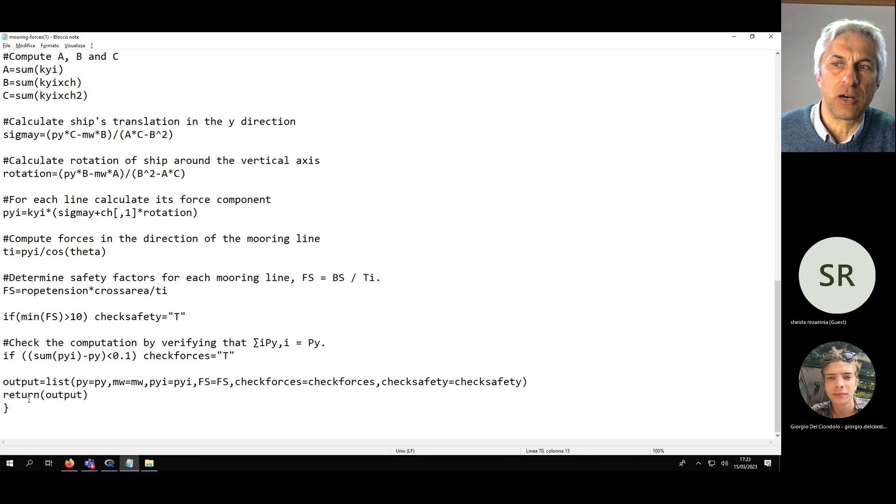And then I give the instruction to return the output, and so I get the list as a result. I leave to you the task—if you are interested, this is not something for the exam, as I said. If you are interested to look at how this function is written, this would be an excellent training for you for R. I leave it to you.